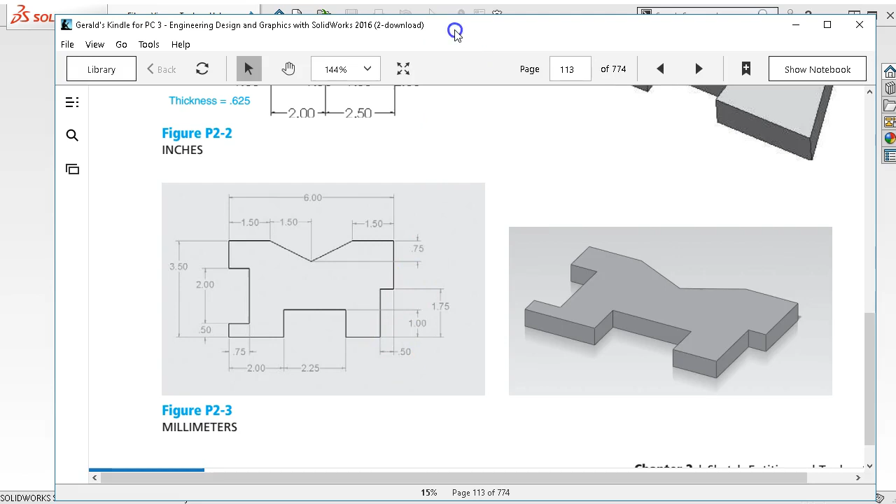For figure P2-3, we have another pretty much standard sketch. One of the things we haven't gone into is starting off with a block and removing material. So from a manufacturing standpoint, if I wanted to illustrate the order of operations or going through a sequence, let's see, this is an inch part.

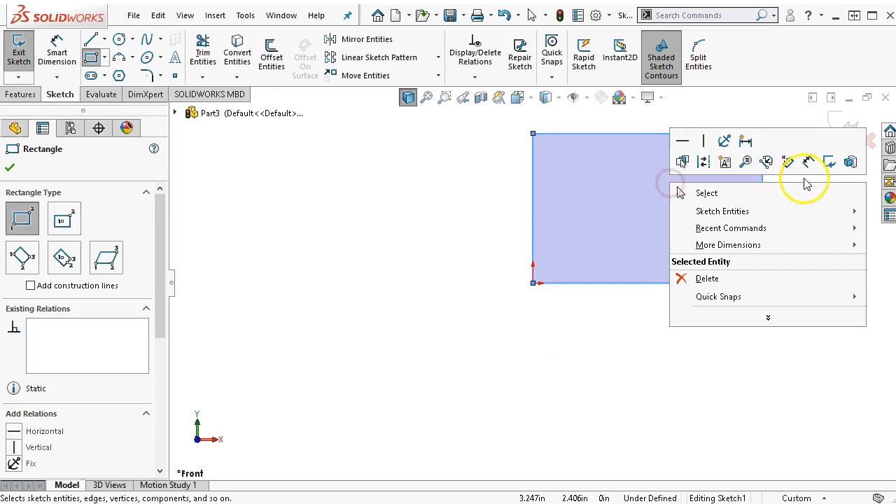We'll open up the sketch. Then one of our techniques could be to start our stock material, and this is pretty much still finished to size.

If we needed to add material to illustrate oversize, one of our issues would be 6-inch material probably isn't going to be... oh, that's interesting, it says 2-3 is in millimeters, so this is a really small part.

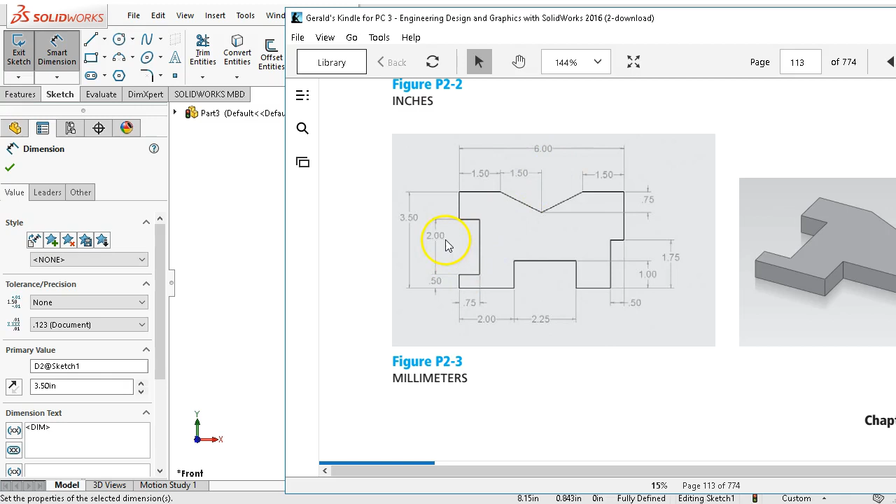Alright, so that being the case, let's fly that back in and double check. Yeah, 2-3 in millimeters, so 6 millimeters would be just a little bit under 1/4 of an inch, and somehow that doesn't line up quite right, but we'll go with it.

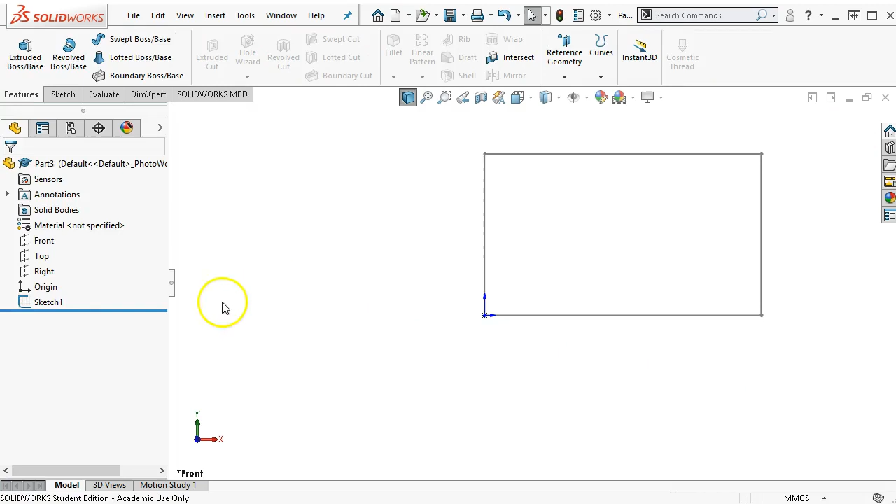So if we do edit document units, we'll see the numbers shift. If I go directly into millimeters, grams, and seconds, it's going to close the sketch and put me out in the feature tree, and I'll have to right click and edit the sketch again.

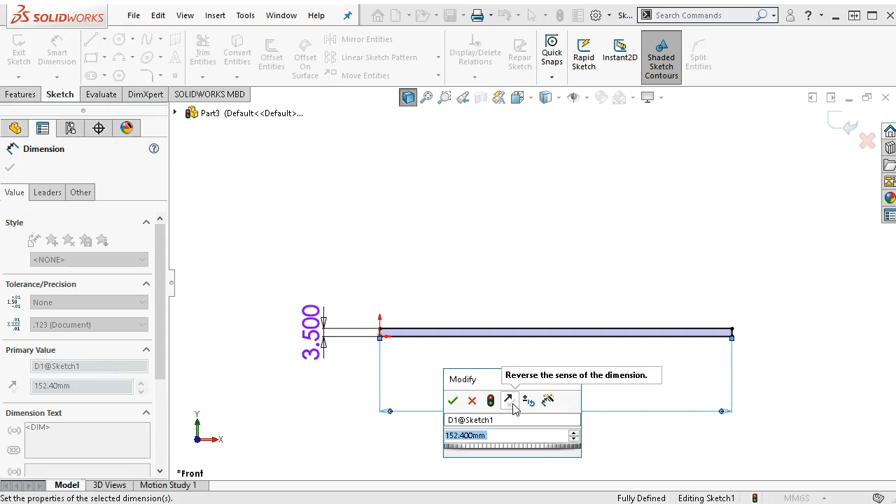Alright, so quite a bit bigger numbers. So let's go 3.5 millimeters by 6 millimeters, and probably don't need 3 decimal places for this, and then we'll zoom to fit.

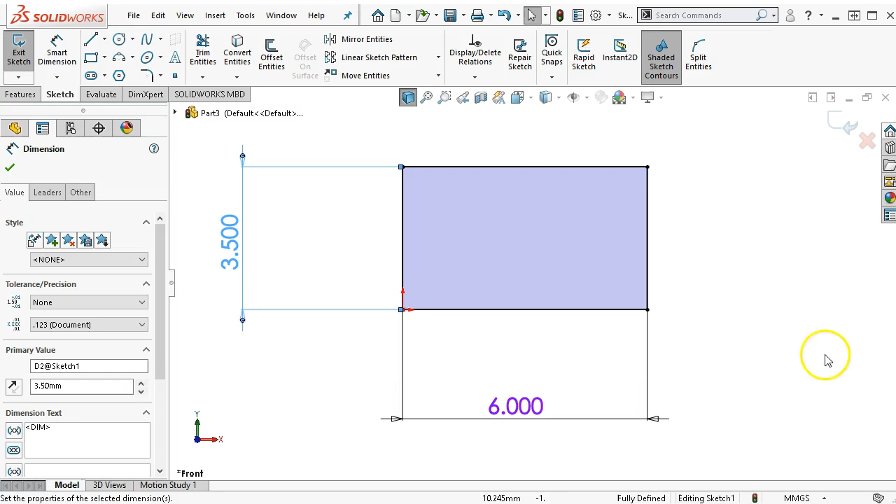Since it was quite a bit larger, maybe with the extension lines it will still kind of zoom to fit a little bit larger than I'd have expected, until, well, let's see what it does now. Pretty much going to that first scale. Since I didn't have a bunch of interior geometry, this doesn't get too crazy on the scaling.

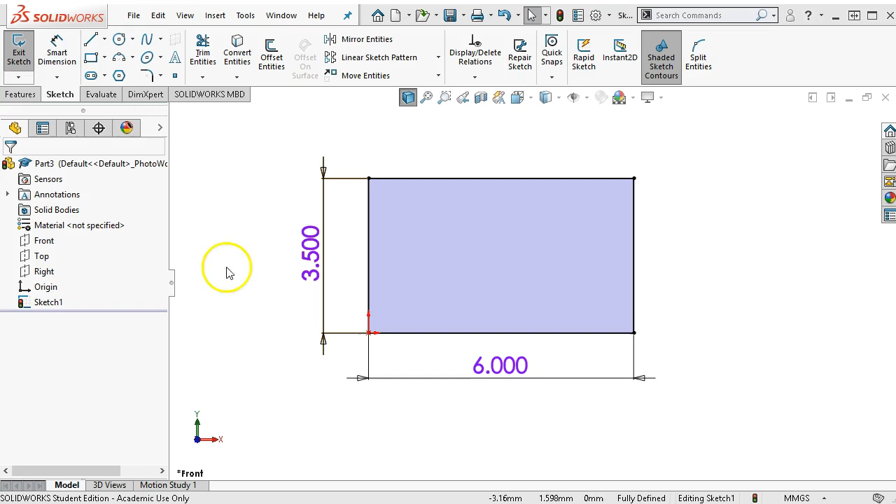We don't have, it doesn't look like they gave us a thickness. So given that we're in such a small scale, I'm thinking maybe a millimeter is going to be more than enough, and maybe even too much.

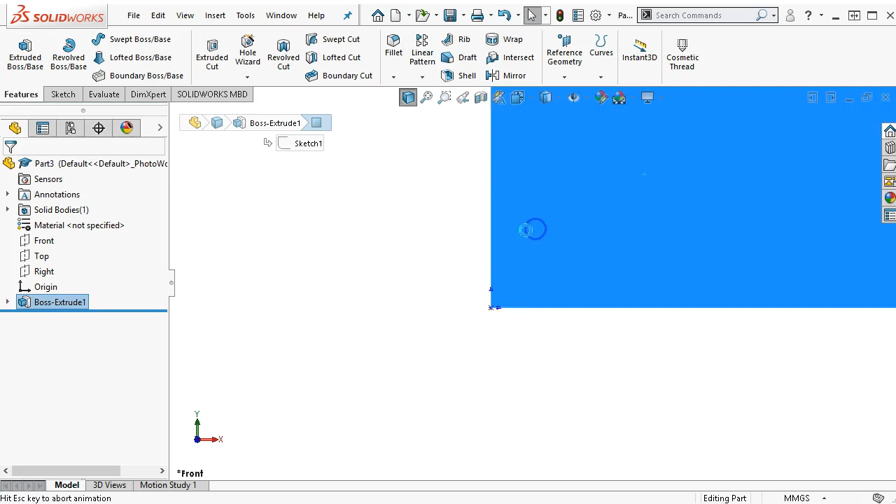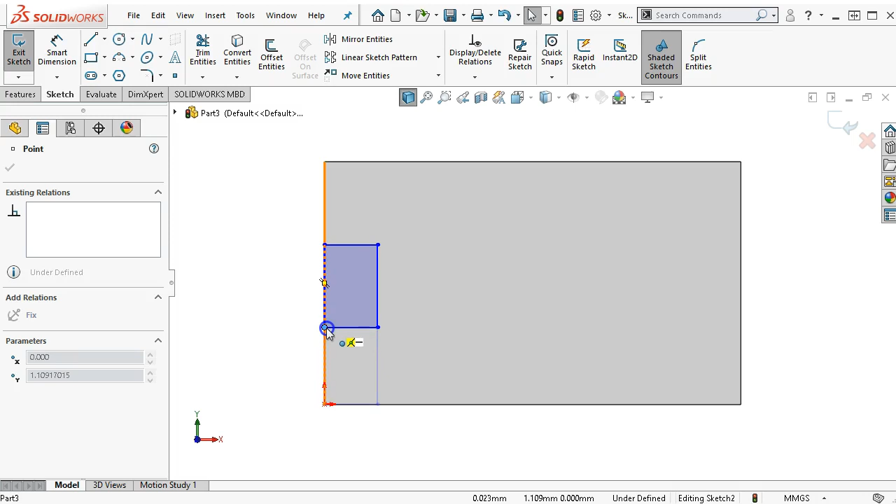Alright, let's go with the size and do a Control-1. So in this case, oh, I missed and grabbed the corner. I'm going to be able to delete that relation. Since it drags out and away, I'll reapply it by getting it close to the edge and letting it find that coincident.

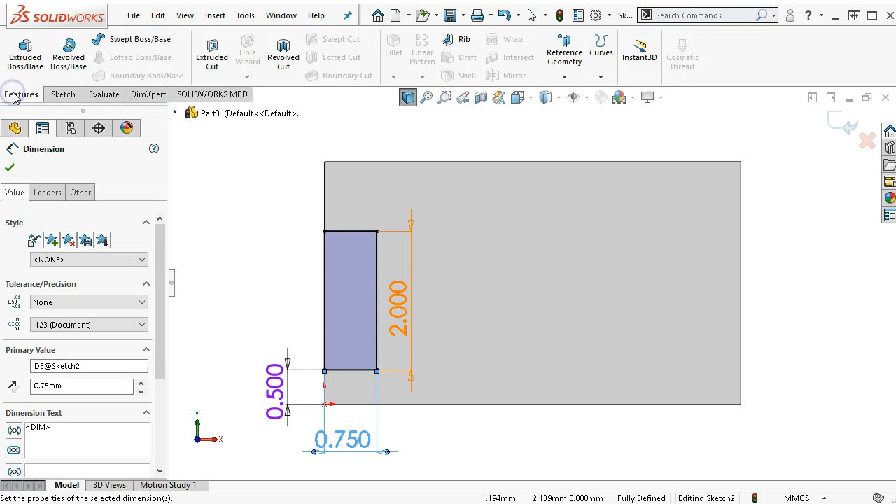And then we'll go 2 millimeters by 0.5, and the depth is 0.75. Then we can extrude cut, and we'll give this through all, or up to next.

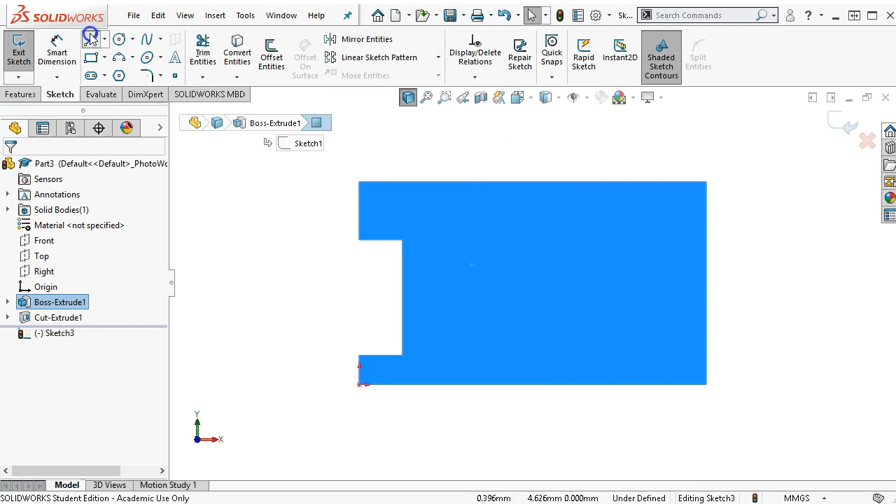So it makes the first cut. And I guess my point here, the takeaway, is that you don't have to include everything in one sketch. You can build it out however makes sense, or whatever your desired outcome is for this part.

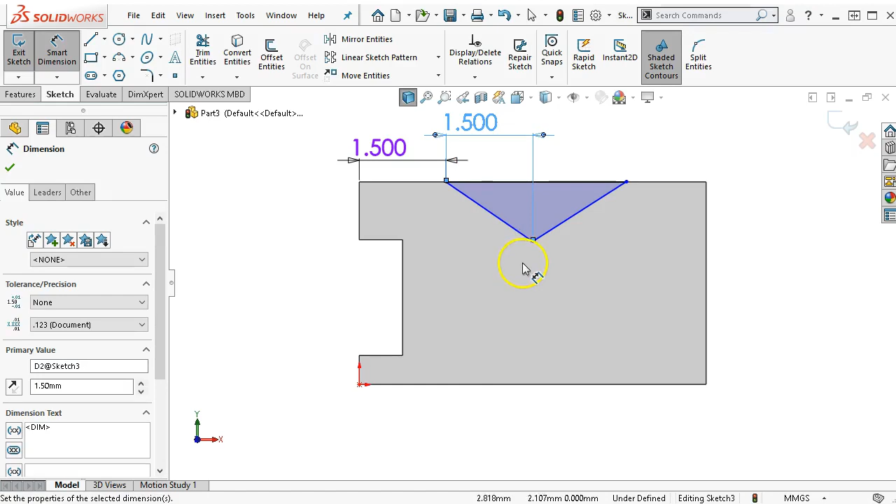So let's go 1.5. We're picking up the edges just like they were sketch geometry in this sketch. They are perfectly valid to drive our geometry. It doesn't necessarily matter that both of these sketches are closed.

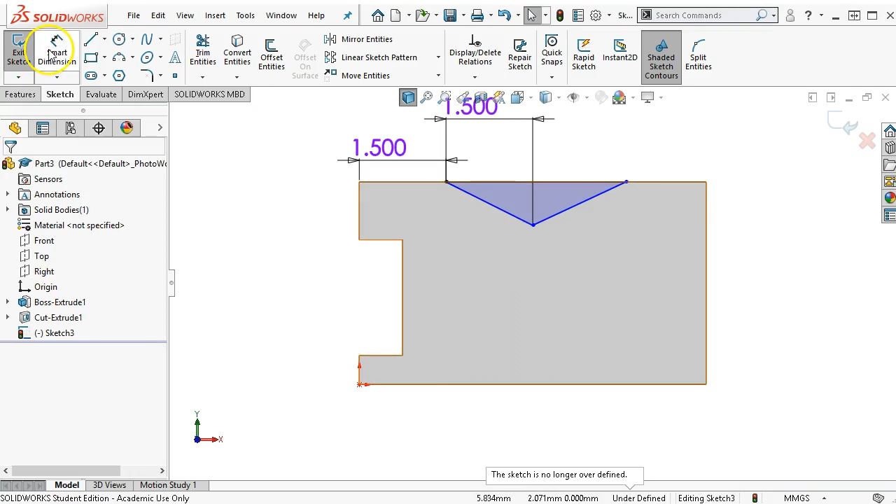So let's see, 0.75 deep, and then we're 1.5 millimeters from the outside. So had something pre-selected there, or I didn't complete my dimensions, so let's try that again, and OK. Then in the order, I'll go with the edge so it clears the other two. 1.5, and then this becomes an extruded cut.

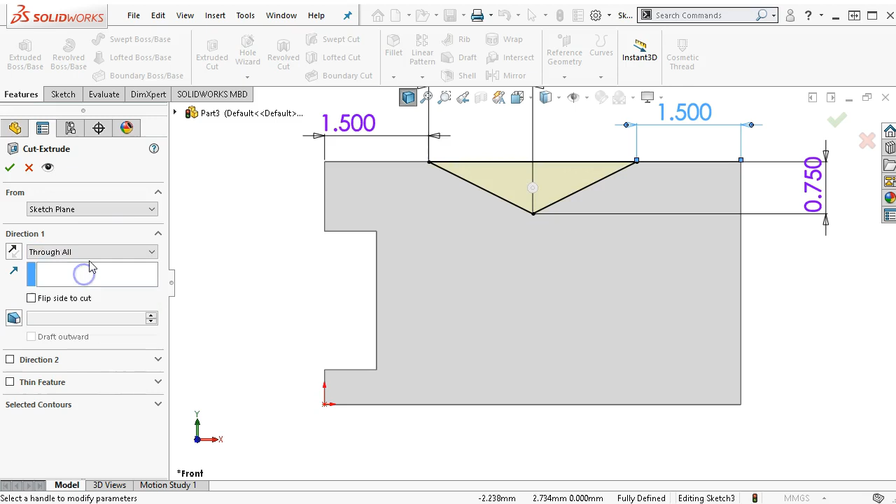Alright, so Through All end condition, we have all of our end conditions, and those will be 2 through cuts. Then I can pick on the face again and sketch. And so both of these were closed contours.

If I decide I want to do an open contour, that's fine, but I can't do 2 open contours. Maybe if I connected them it would be able to calculate the geometry, so I'd have to draw a line over, up, over, and down, and then tell it that I'm cutting to the outside of the geometry.

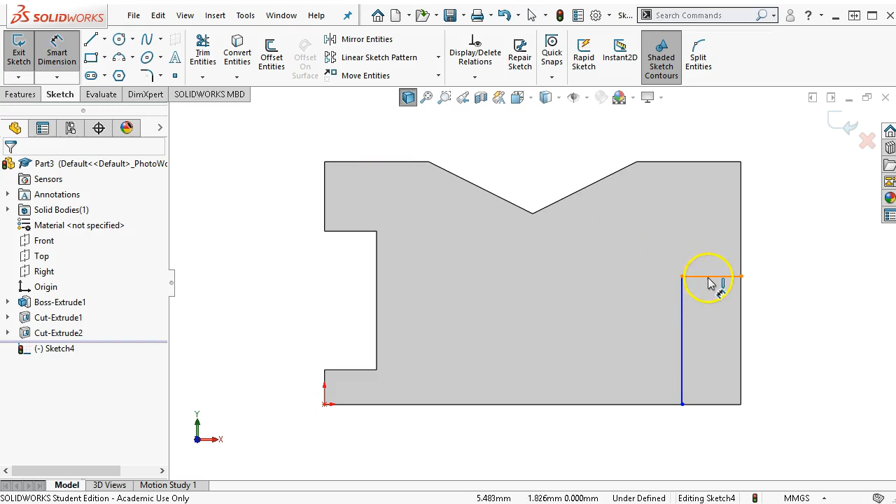So we'll do this again, so 0.5 and 1.75. And then on the direction, when I go to make the extruded cut, I'm only going to get blind, through all, and through all both.

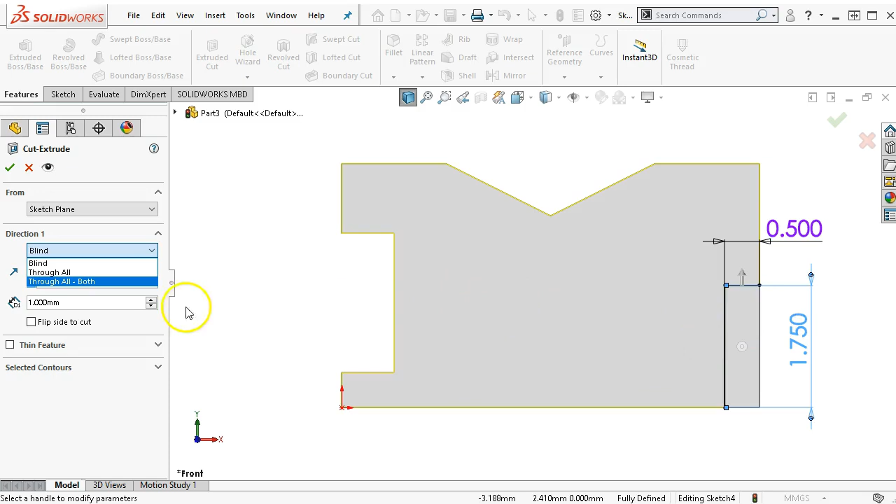Depending on where this sketch originates from and what I'm able to generate, we'll go with through all, and it kind of defaults to through all both. Or if it was a blind end condition, we could set a depth into the end of the part. So there are some restrictions to those open profiles.

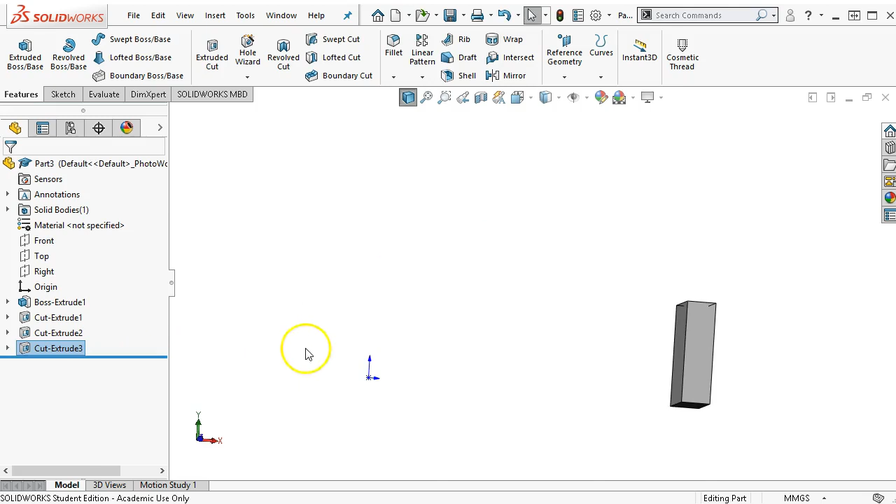And then that would be, I didn't pay attention to my arrow, so it removed the wrong material. We'll right click, go back in and edit the feature, and the little arrow here shows me the side to cut. I can either click on that arrow, and notice the checkbox over here goes to a check condition, flip side to cut.

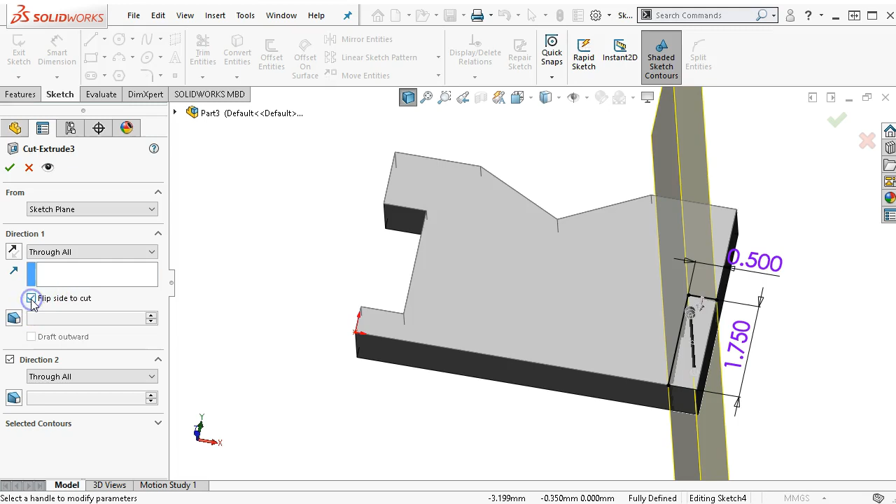So if I do the checkbox, I'll see that go back and forth, and now I have the correct direction for the cut. And then the last one, same thing.

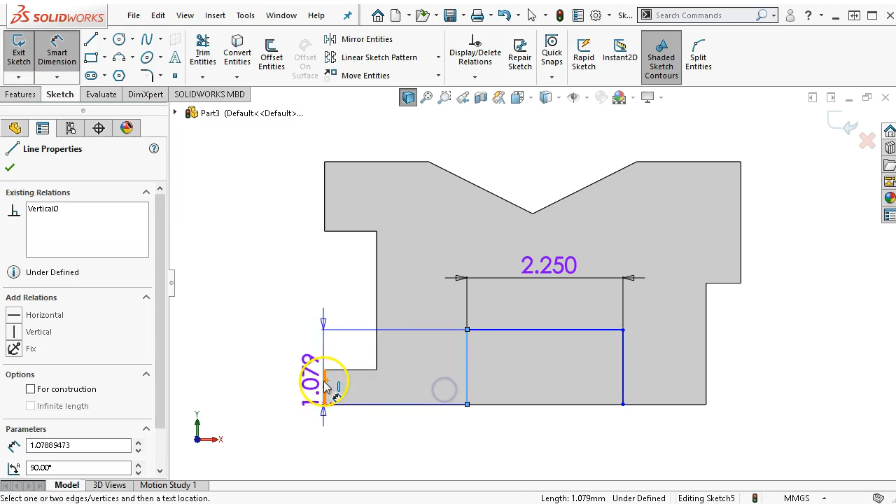If I want to make it an open profile, then we can include the geometry, 2.0, and a depth of 1 inch.

Alright, so one of the ways I can check that this is an open profile is if I right click and select the chain, it highlights in blue and goes to the 3 sides that I drew, and not to the 4th side that would complete the rectangle.

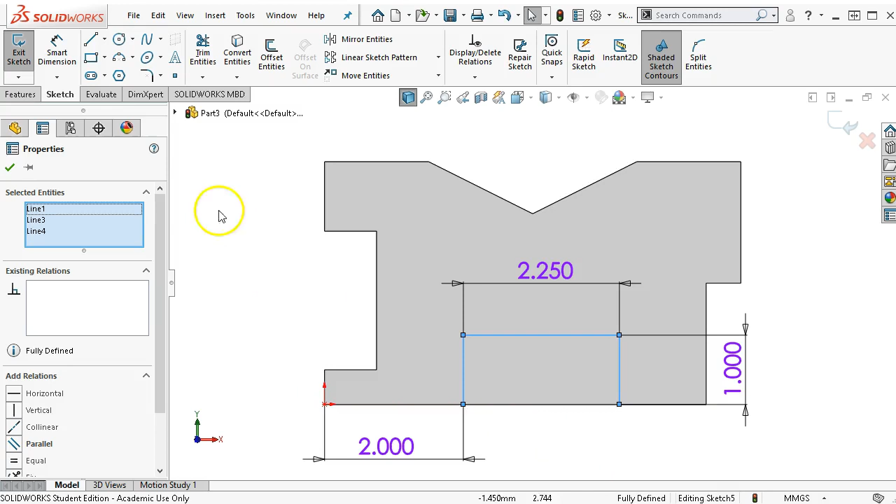So once again, when I'm using an open profile, I want to make sure of the direction of the cut, that I'm cutting the material that I need to remove, and then this is going to be a through all.

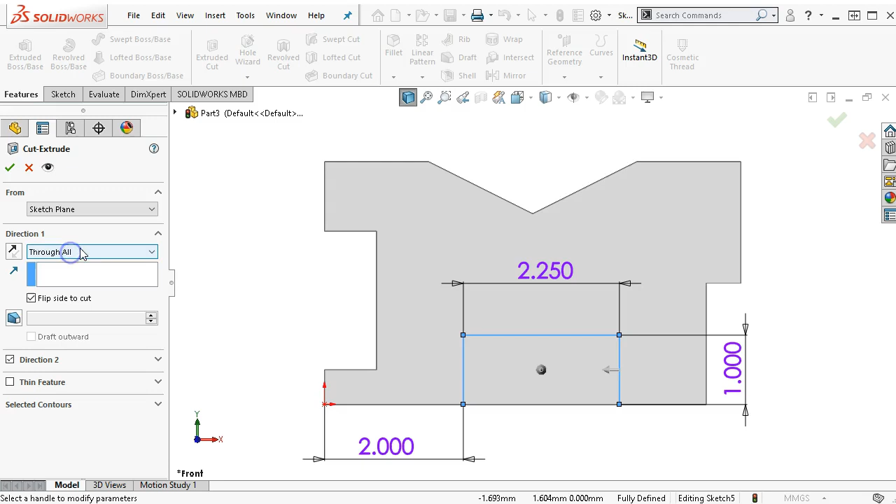So the only thing, when they added the blind option over the last couple of versions into the open profile, is it would be nice if it still defaulted to through all, and you only had to change the blind end condition when you need it.

Alright, so there's our part for P2-3. We'll save it and be ready for the next.